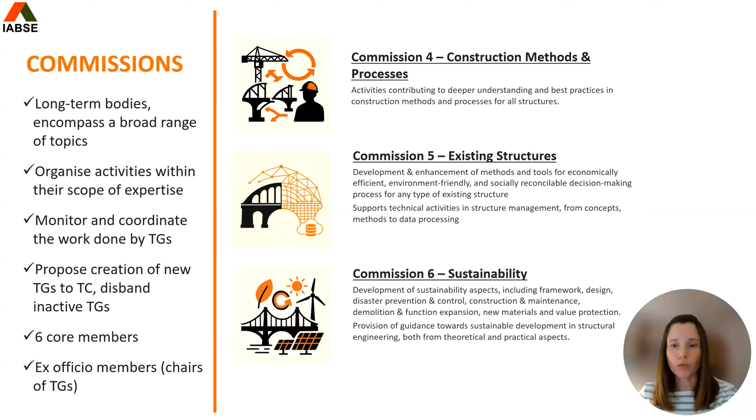As chair of Commission 1, I can give you a closer look at our work. The problems we tackle are wide-ranging. Just look at the scope of our current task groups.

We address crucial topics related to hazards, like TG 1.1, improving seismic resilience of reinforced concrete structures, and TG 1.2, design of bridges against fire hazards, and TG 1.14, performance-based holistic design concept in fire engineering.

We also aim to integrate advanced concepts into technical practice, such as in TG 1.3, calibration of partial safety factors for the assessment of existing buildings, TG 1.4, probabilistic nonlinear finite element modeling, and TG 1.6, benefits of practical application of risk and reliability consideration in structural engineering.

We are heavily involved in forward-looking topics, such as those covered with TG 1.7, sustainability-driven bridge engineering for early design phases, and TG 1.8, design requirements for infrastructure resilience.

Furthermore, we address critical safety issues like ship collision with bridges in TG 1.13.

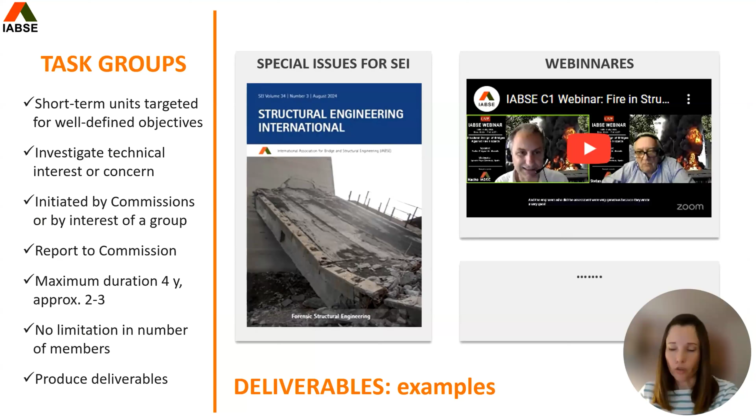My own involvement with IABSE illustrates these diverse opportunities. I've been an IABSE member since 2010. A year after, I joined the working Commission 1. Further on, I was the vice chair of Commission 1 before taking the role of chair in 2025.

Below is a report on one joint IABSE and European COST Actions workshop, which I organized in Zagreb, on the value of structural health monitoring for reliable bridge management.

Beyond the commissions, I've had...

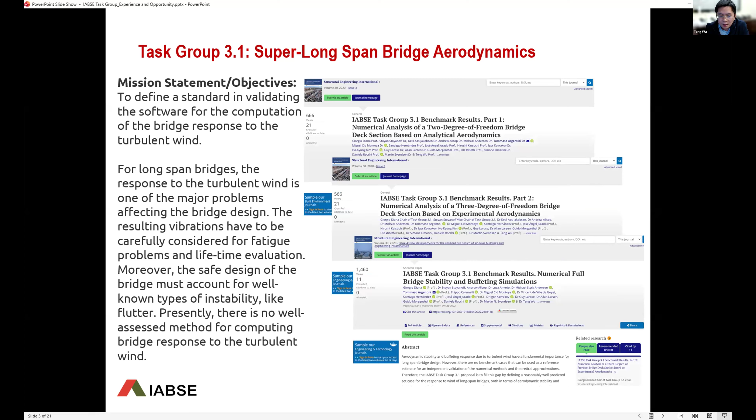If we want to define a standard, among the development of this task group's activities, we decided to publish a series of papers about the benchmark. So far we've published 3 papers. This task group has mainly been led by Professor Giorgio Diana and several other colleagues from industry. Our latest paper has won the IABSE 2024 Outstanding Paper Award.

So you see, my past experience with the task groups has been quite good and very productive. I really enjoyed the task group, not only the outcome, the product, the recognitions, but more importantly, during my involvement in this task group, we achieved something each individual cannot achieve alone.

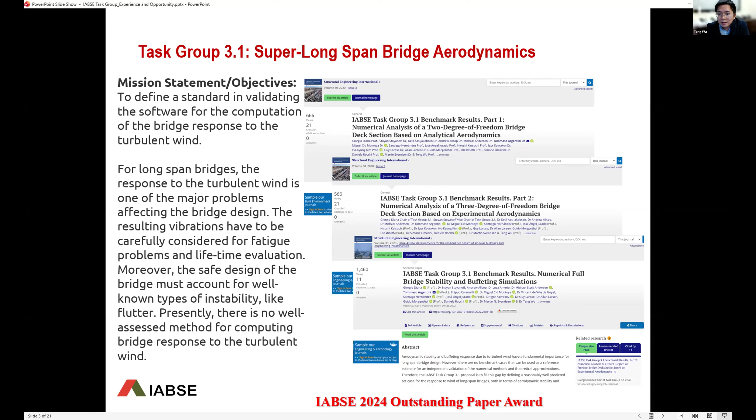Currently, most of my effort is in task group 3.10, about AI integration, led by Dr. Xiaomeng Wang. This task group is just in the beginning, early stage, so we still welcome new members. Anyone interested in AI and AI applications in bridge structure engineering is welcome to contact Dr. Xiaomeng Wang, or you can simply contact me, and I can forward your interest and information to our chair.

The major purpose of this task group is that, of course, we know AI is rapidly evolving and brings deep revolution to this industry, the AEC community. In the previous task group 3.6, the big achievement was to establish the AI in AEC conference series.

That's in Finland, I think, if I remember correctly.

For this task group, we aim to establish a global and systematic approach to prepare the entire engineering community, especially the bridge and structural engineering community, for the transition to the AI era. So there are three phases.

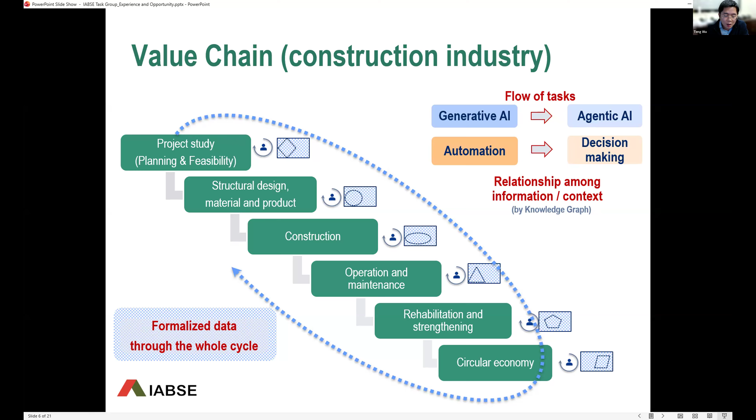So there is a value chain, starting from the project planning stage until the structural design, construction, operation, maintenance, retrofitting, and finally circular economy. Each stage can be enhanced or improved by AI, leveraging these powerful tools.

The scope of the task group has three tasks. The last task is optional - hopefully we can achieve it, but it may feel a little too ambitious, so we will focus on the first two tasks first. First is the review of the state of the art. Second is the digitalization of knowledge, especially based on the IABSE database and other public databases.

Now the expected outcome for task one is a review paper. For task two, it's the digitalization of knowledge that will result in a tool so that people can use.

Currently our review work has been a little delayed. We're supposed to have a revision and updating of our first draft, but actually we're still preparing our first draft. So this is the right time to join in and contribute your time, effort, and expertise in the relevant domain.

I will skip the review details.

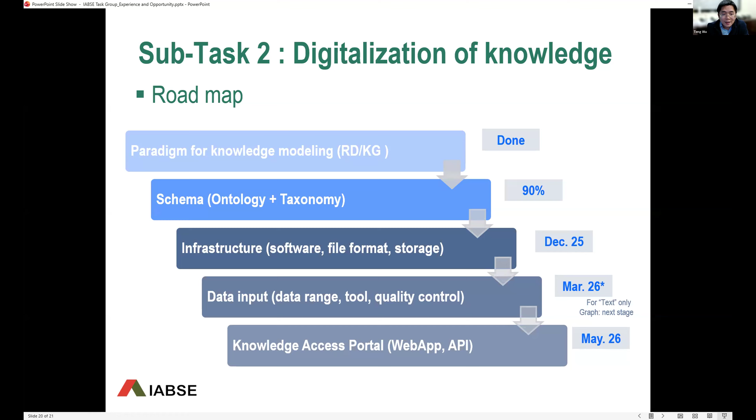That's pretty much all for these three task groups, and I'm happy to answer any questions, if any.

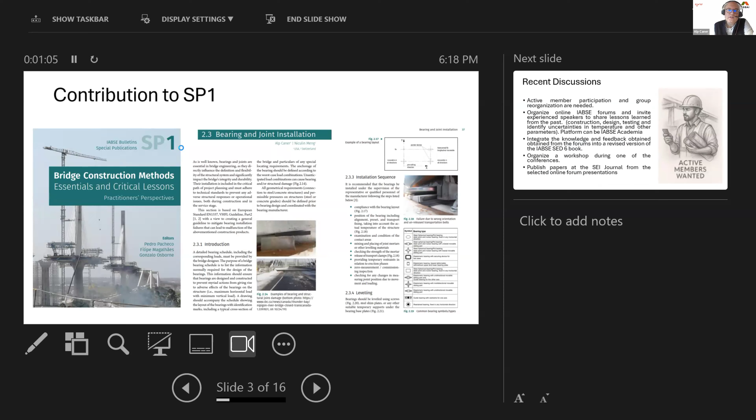There was a book, Bridge Construction Methods, SP1, and we provided a chapter for that - on bearing and joints installation. It is more about construction problems and how the bearings should be installed. So this is something that we did.

And in 2025, basically these are our discussions. I think we need more members and more participation in our group. One discussion was about organizing online IABSE forums and inviting experienced speakers to share lessons learned from the past. This can be on topics of construction, design, testing, and identifying uncertainties in temperature and other parameters.

And the platform can also be the IABSE Academia to do this. Our group has published a book before, like 20 years ago, and I know Martin has a hard copy, and I have an online copy.

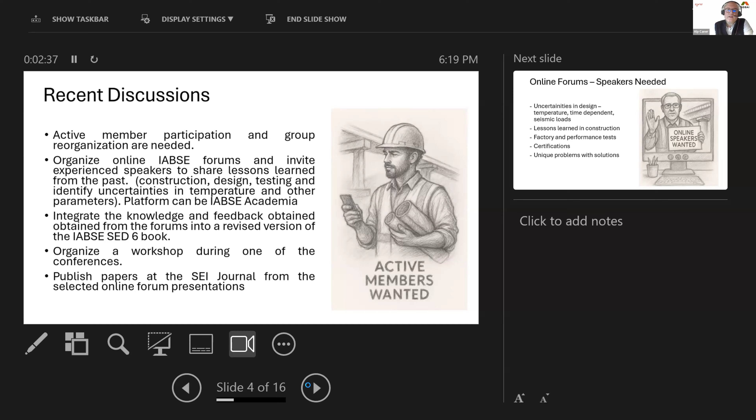This can be downloaded free by the members, but we want to update this basically, and our plan is to do a couple of forums and speakers, so we get information from them and then organize the material and place it, and then at the end we are going to have a workshop. And of course we can always try to publish all these results at the SEI journal. And the next thing we are looking for is speakers.

Basically the speakers can be talking on the bearing and joints. Of course, there are many topics. I just wrote some selections here, like uncertainties in design. The special thing we are talking about this year is temperature, since each country has a different temperature criteria, and that's not standardized, which creates a problem. Time-dependent effects and seismic loads are also important.

Lessons learned in construction, factory and performance tests, certifications, and unique problems with solutions may be other topics of interest.

The topics in this book include: introduction, role of bearings, general types, layout of bearings, calculations, construction of bearings, materials, analysis, installation of bearings, inspection and maintenance, replacement of bearings, codes and standards, and references. So in the first 40 pages, this book briefly covers these topics.

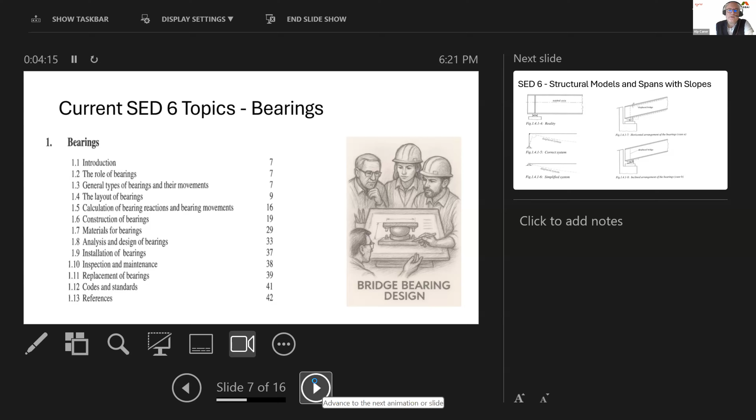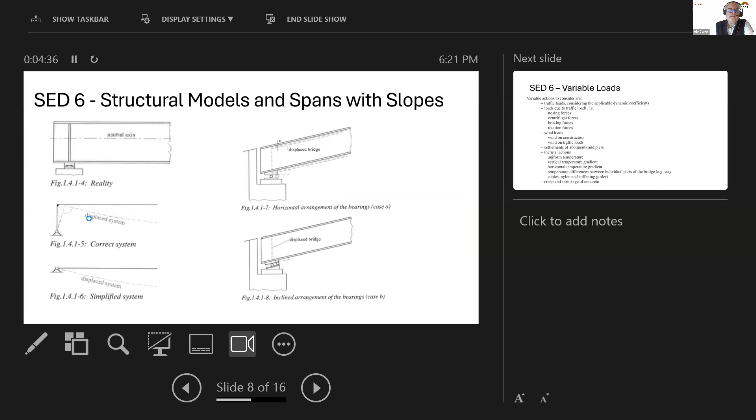When you look into the book, you can see some special cases. Let's say you have a bearing and the bridge is straight, but if the bridge is on a slope, how are you going to do the bearing installation? These are topics discussed in this book.

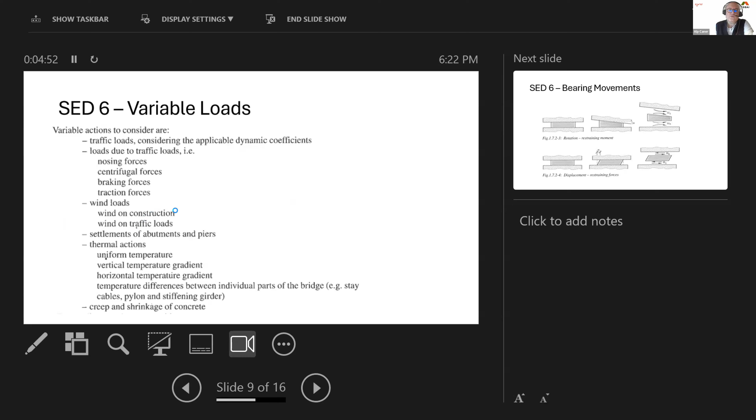Regarding variable loads, in bearing design you see that there are at least 20 loads, and how, at what stage, or what are the important things are discussed in this book. The bearing movements, like rotation and displacements, are also described.

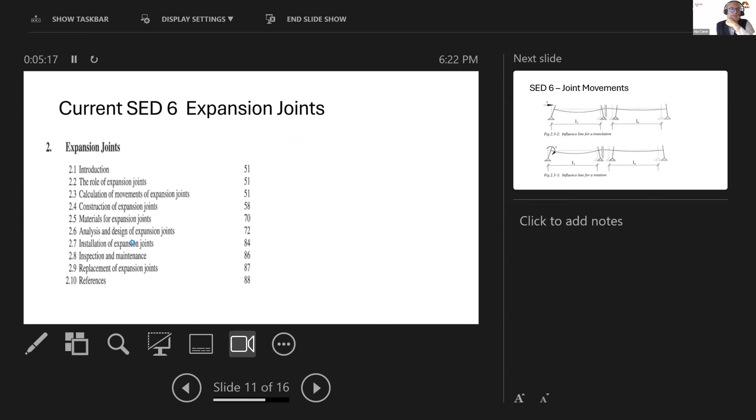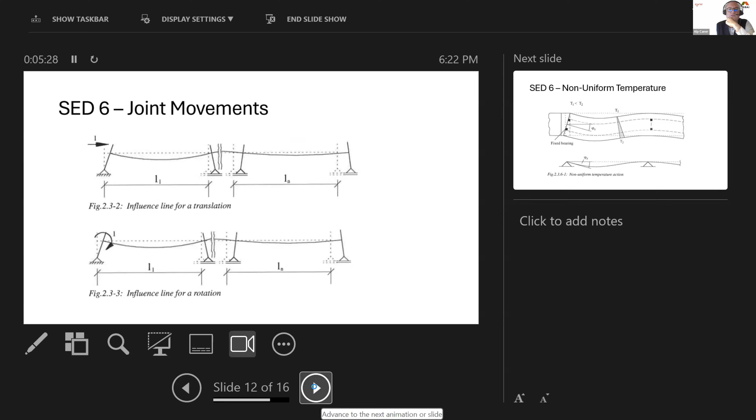When it comes to expansion joints, the topics are the role of expansion joint, calculation, construction, materials, analysis—very similar to the bearings—installation, inspection, and maintenance. It also discusses the typical movements for design of the expansion joint, and the effect of non-uniform temperature on the bridge.

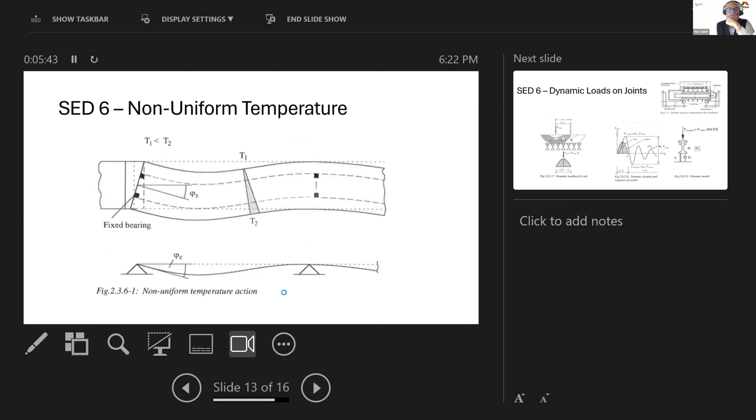This is the plan view, so the bridge doesn't only elongate in the longitudinal direction, but there may also be transverse displacements. And of course, dynamic loads on joints, like when the wheel comes onto this joint, what happens to the whole system, needs to be looked into. This book briefly talks about that.

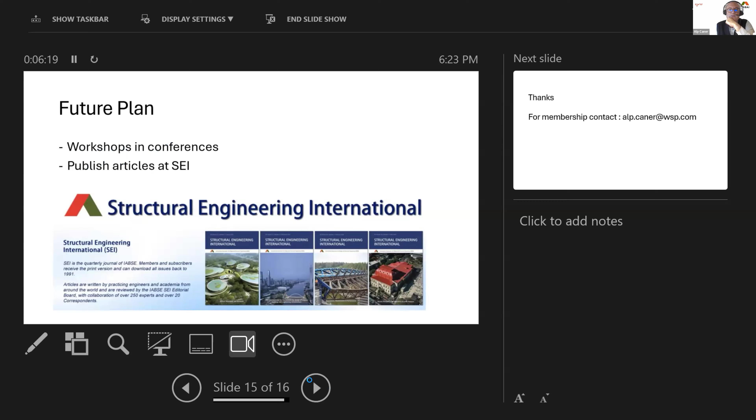Our future plan is, at the end of all these webinars, to do a workshop at one of the conferences, and of course the ultimate goal is to publish an article, definitely.

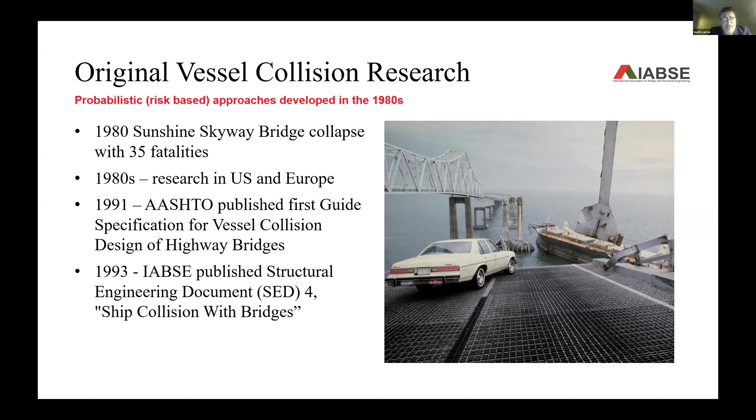A couple of years thereafter, IABSE published Structural Engineering Document 4, Ship Collision with Bridges, which has been a very popular document ever since. At the time in Europe, a lot of the research going on was also related to the design of the Great Belt Bridge. So a lot of that was captured in SED4, as well as the work done in the US leading up to the AASHTO guide spec.

So it probably makes sense that after all this time, we might take another look at updating research and reference books.

I really came to use SED4 a lot in the design of Queensferry Crossing in Scotland, which was the first long span bridge in the UK to be designed to the Eurocodes. Amongst other things, one of the things I got really involved in was the vessel collision design there. In contrast to AASHTO, where everything is codified, in the Eurocode many things are not set out in detail, so you do have to turn to external references. SED4 is a fantastic book for helping you understand and build up a good basis of all the different things that go on in a vessel collision study.

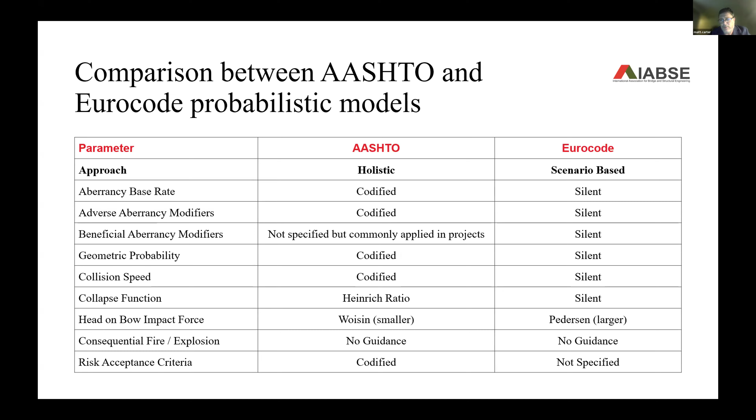I'd say it's also really relevant to US practitioners as well. Although AASHTO is a fully codified standard, it is very useful to be able to understand the broader aspects of the topic.

A good contingent from the US. Gary Consolazio has done some incredible groundbreaking research using both physical impacts and finite element analysis of barge collisions, which are very important in our inland waterways here in the US. Mike Knott is the lead author of the original AASHTO vessel collision guide specification. Mike Winters, his right-hand man for many years. Myself, I'm a practitioner. As I say, I've been involved in vessel collision analyses to both Eurocode and AASHTO. So it's a good group.

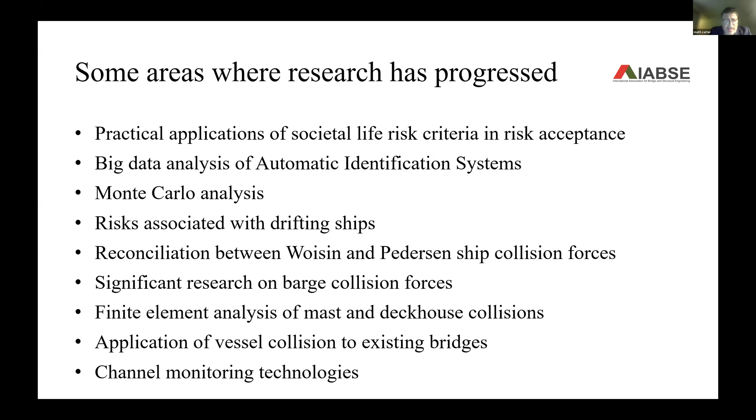This is some of the areas where research has progressed in the last intervening decades, not all of the areas, but there's many things that have progressed onwards, which we want to include in this update. And where we are at the moment, we've established the expected content of the new book, which is by and large in line with the content of the old book, but with a couple of additional chapters. We do want to make sure that it's clear that it's relevant to assessment of existing bridges, not just design of new bridges, because that's definitely something that's on a lot of people's minds right now.

Chapters have been assigned to lead authors and support authors, and first drafts of most of the chapters have been prepared. At the IABSE Congress in Ghent this summer, the task group got together in person. We typically have online meetings every 2 months approximately, and we also presented a synthesis of the work done to date at the Congress. So right now the objective is finalizing the first draft of the complete book, and once it is finalized, then we'll go through the different editing cycles and would be looking to publicize it so that people know what's in it.

And we hope it will continue to be a great reference. It still is a good reference right now, but it needs that update to sort of bring in all the more recent research. All right, thank you very much.

Thank you, Matt. That was a very lively presentation, and I hope you get more interest as well.

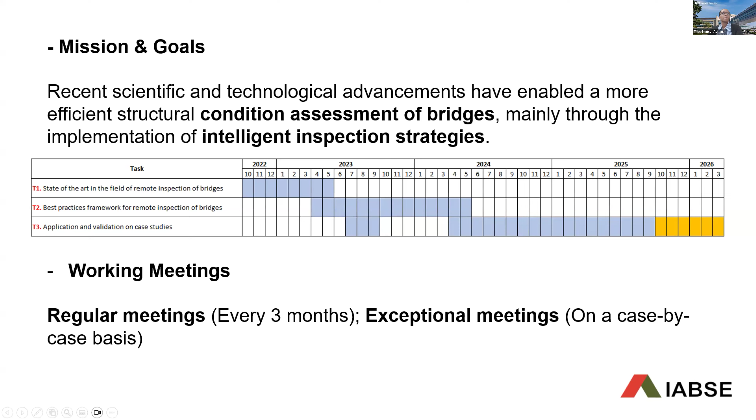Let's see what else. Here we go. Okay, so just a little bit of a review or summarizing the outcomes of the task group.

We already have 2 publications. One, technologies and platforms for remote and autonomous bridge inspections, a review of different technologies involved in this matter. That was published in Structural Engineering International.

And we also have a journal on methodologies for remote bridge inspection. Again, a review. Each task member collaborated or dropped in some information that we were able to assemble into these 2 journal papers. We had participation in 2 conferences, one being the IABSE Congress in 2024 in Costa Rica.

And we also proposed a mini symposium on the ASCE EMI, the Engineering Mechanics Institute, in Anaheim in May of 2025.

As I mentioned before, we still have some tasks that are ongoing. In preparation, we have 3 structural engineering documents. You can see the preliminary titles in there for task 2.1, 2.2, and 2.3.

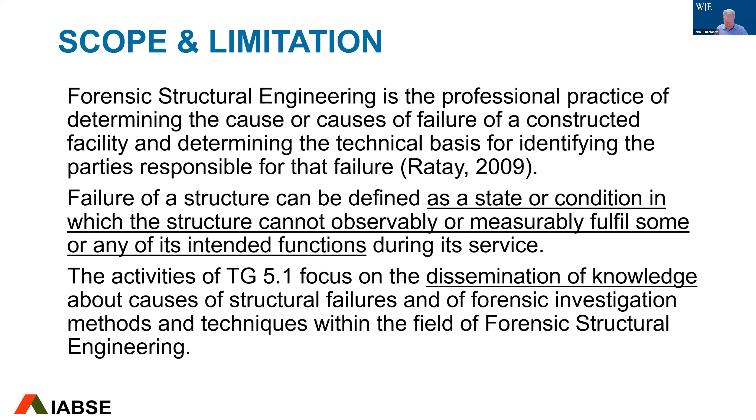I'm going to go through a couple of slides now to outline the activities we've performed or conducted throughout the history of the TG, and more recently in this current working period.

Probably one of our most prominent activities is the development of workshops, kind of one-on-one interaction with the profession, generally organized around the congresses or symposiums. To date, we've done 7 of these workshops throughout the world.

The topics and organization of those workshops are pretty similar from one to the next: defining what forensic structural engineering is, and then identifying the steps to investigate the causes of these types of failures.

We're pretty heavily weighted toward analyzing causes, cases, and lessons learned from failures, and then talking about how to mitigate future failures. What's really well received by attendees in these workshops is working sessions where we identify a failure, go through the background, and engage the attendees to contribute their thoughts about the process and findings of these high-profile failures.

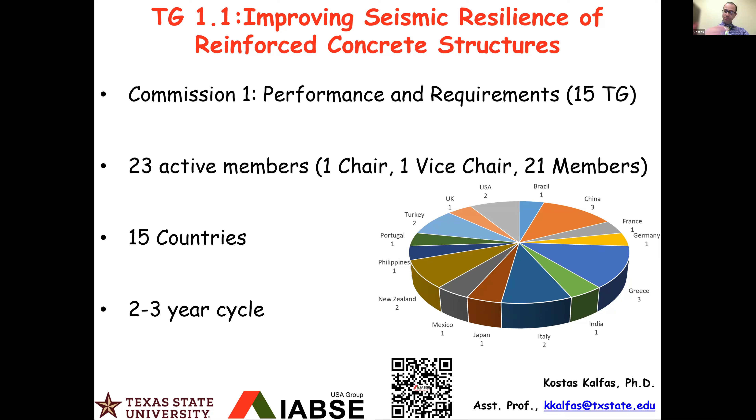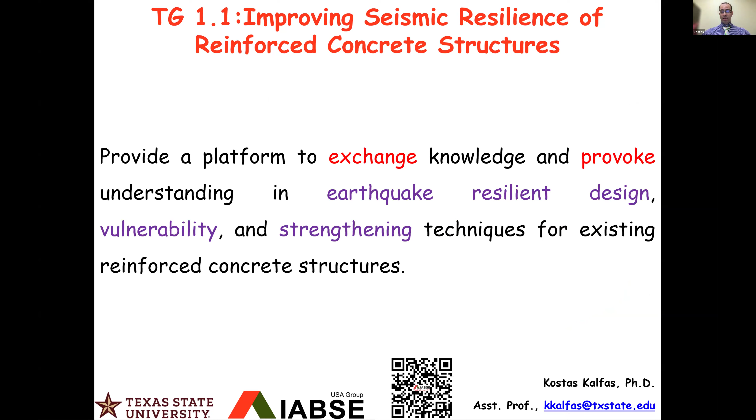This is the mission statement of our group. We gather and work together to provide a platform to exchange knowledge and provoke understanding in earthquake resilient design, vulnerability, and strengthening techniques for existing reinforced concrete structures. You will see in a few minutes in my slides what we have produced so far and how we try to accommodate this statement.

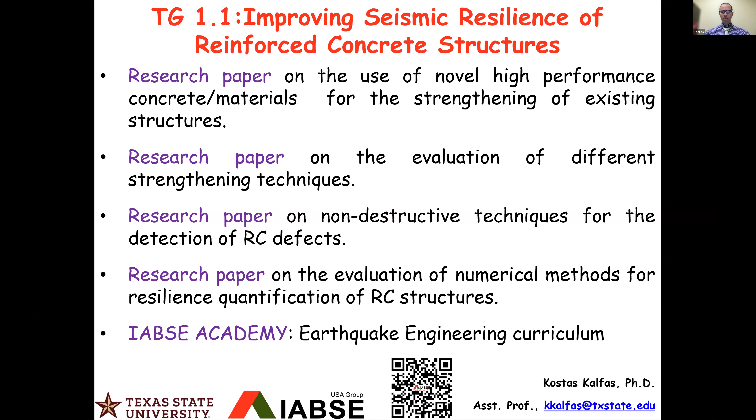And 6 of the 23 members are also participating in the IABSE Academy earthquake engineering curriculum, where we develop short lectures on earthquake engineering for the IABSE Academy, which isn't live yet but will be in a few months or next year. This is it from my side. I hope I did not exceed the 3-minute limit, and thank you very much for your attention.